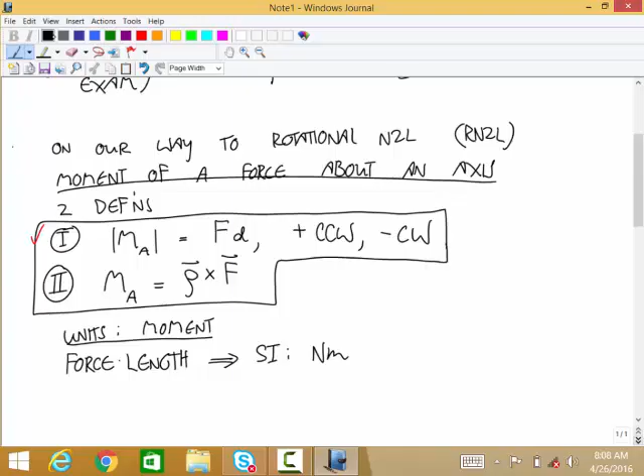That too. It sounded long to me. Then why are you leaving it out there? One of the back tables. What?

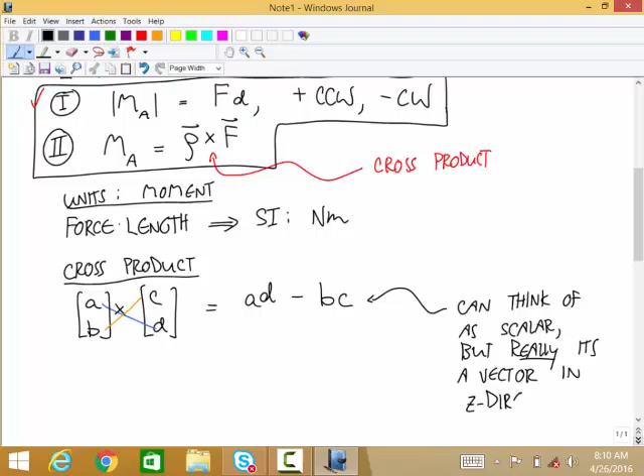So let me start by saying a couple things about the end of the semester. What's left? Our exam 4, our last exam, is a week from Friday, so that's Friday, May 6th.

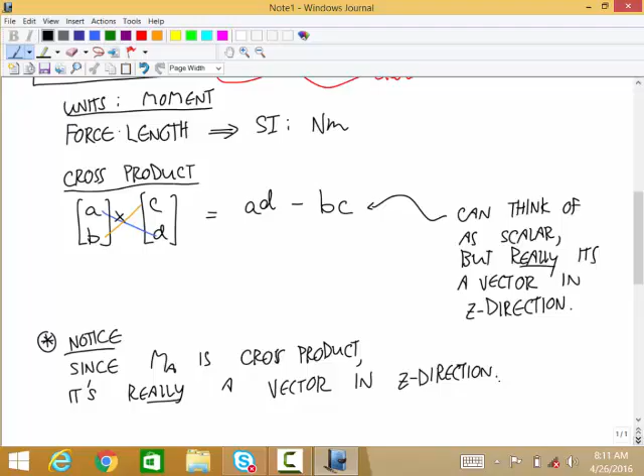And we have a final lab exam. I didn't look up when, I think that's probably the Thursday before. And the AP test is Monday, May 9th.

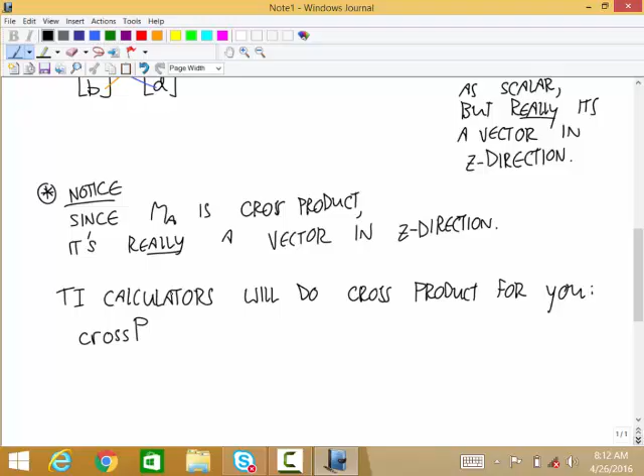And then this isn't on the syllabus, but this is something I talked to Meredith about, and I'm going to offer this option: a makeup exam. It's basically going to be a new version of exam 4, a cumulative exam.

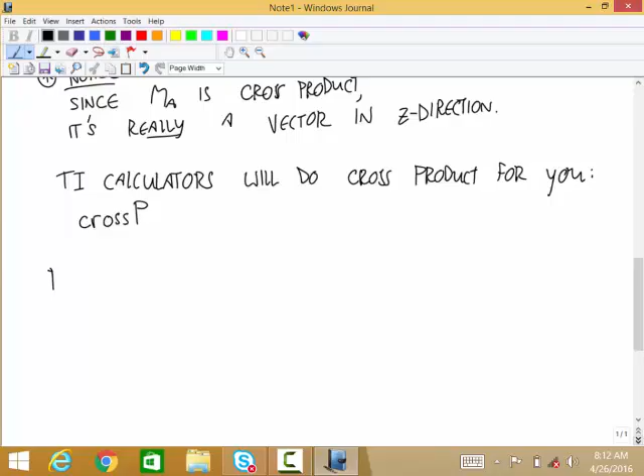But that score can replace any one of your first 4 exams. So if you're not happy with any one of your first 4 exams, you can do the makeup on, I think Meredith and I agreed, Tuesday morning, at the normal time. Yep.

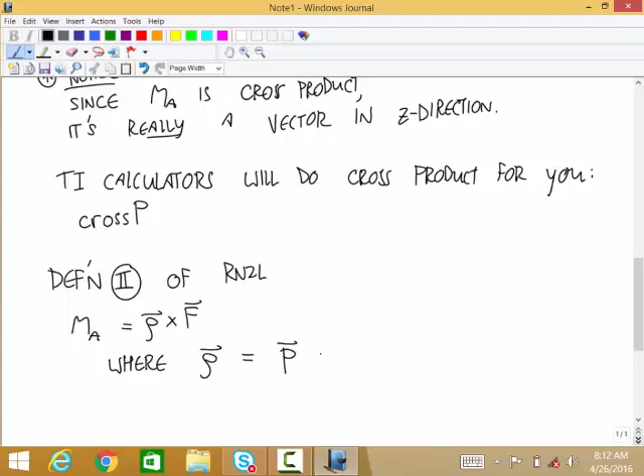Well, I guess maybe we'll do that on Tuesday of next week. What? The lab exam. Oh, the lab exam. Okay.

Is the makeup exam going to be on May 10th? May 10th. Yes.

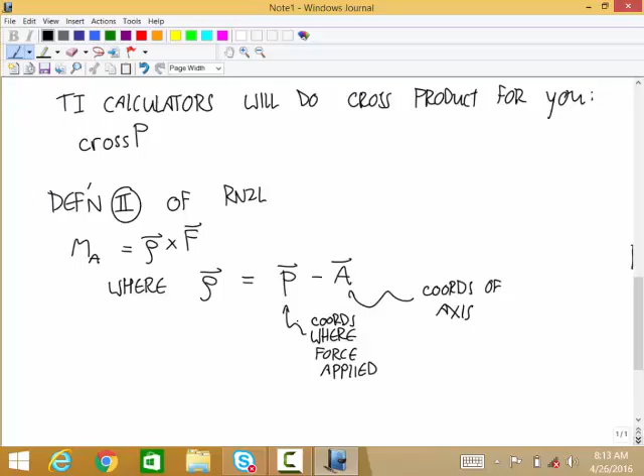So that's the stuff that's coming up. And this stuff all has one thing in common. What you need to do between now and then, well, the lab exam is kind of its own thing, but definitely the other 3, is you need to...

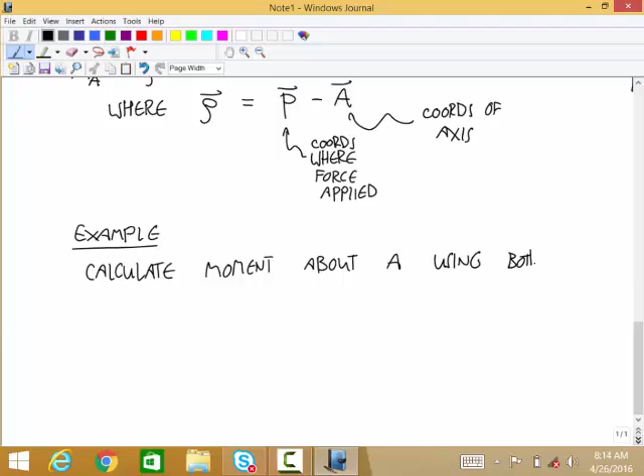Between now and then, you need to skim all the notes. Your goal is to remember everything I said. That's maybe not some of the stupid stuff about the bell signifying God bless you and stuff, but all the stuff I said relating to physics. Your goal is to remember all that stuff. I know that's a lofty goal, but that's what you should aim for.

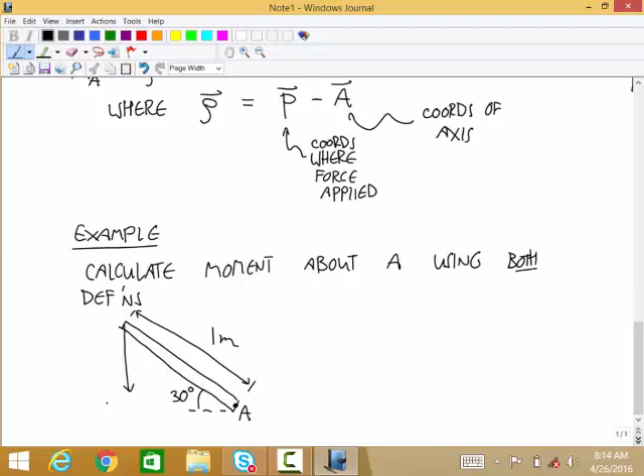That's your goal. And then the second thing is, let me say this a little stronger: you should know how to do all the assignment problems.

And the best way to do that, I think, is you need to start looking back at this stuff now, because you don't have a lot of time. I would say skim the notes and look back at the problems, starting at the beginning. Ask yourself, do I know how to do this problem? Do I know the steps? What are the steps? If you know, move on to the next one. If you get to one you don't know how to do...

Think about where you're unclear on what to do, and then look at the solution. If you're more unclear than that, then you have to work through the problem.

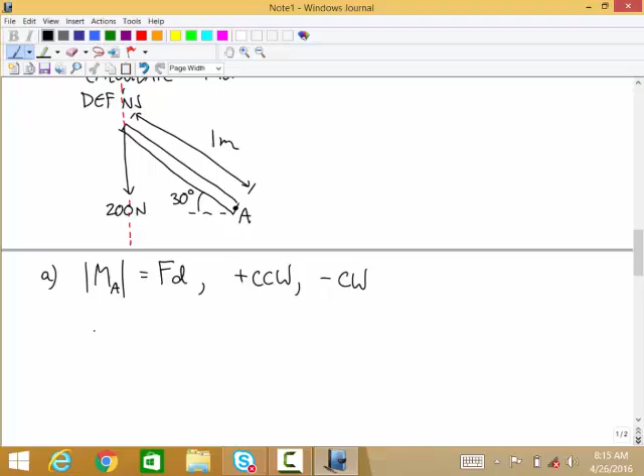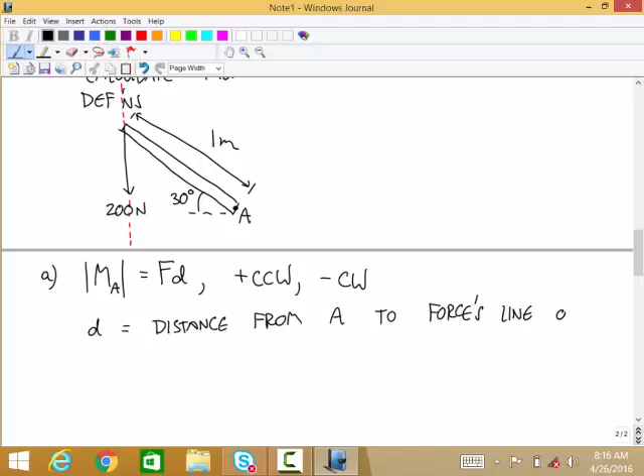So that's your goal. If you get to the point where you remember everything I said and you know how to do every problem I've assigned, you're going to get 100 on exam 4 and the makeup test, and you're going to do great on the AP test. That's kind of the upper level of what you're trying to get to.

Anybody have any questions? Could the makeup exam technically replace a homework quiz score? It's unbelievably bad. What's the point of that, actually being more valuable to you? That is a funny question. Yes, that is fine with me. But if that's your position, you don't have much to worry about, you know what I mean? But yes, do that. Okay.

Because I think each homework quiz is only worth about 2% of your grade or something, right? Maybe a little more, but less than 5. Any other questions?

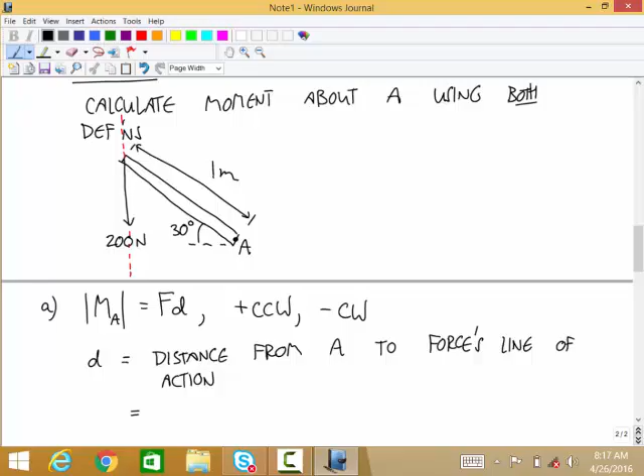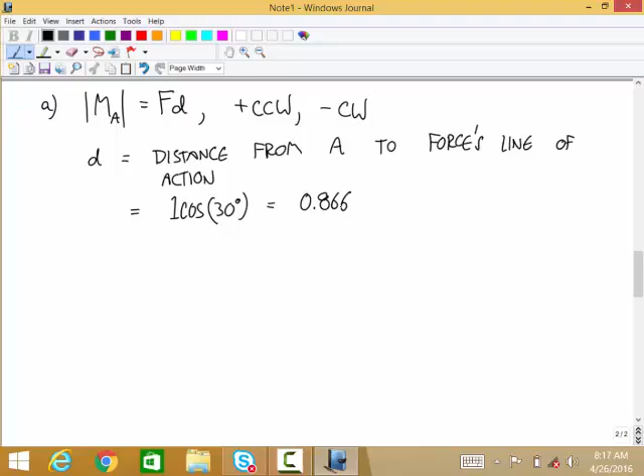Okay, so here is what we've been talking about. We're on our way to the rotational version of Newton's second law. And we just started talking about the moment of a force about an axis.

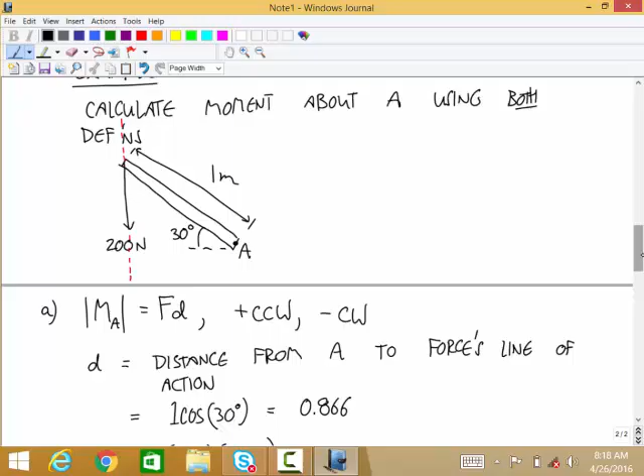And there are two definitions. The first one was that the absolute value of the moment about the axis is equal to the force times the distance, where positive is counterclockwise and negative is clockwise. The second definition we haven't gotten to yet, but I'll write it out. That uses a calculation called the cross product. So the moment is equal to a rho vector crossed with a force vector, and that does the signs for you.

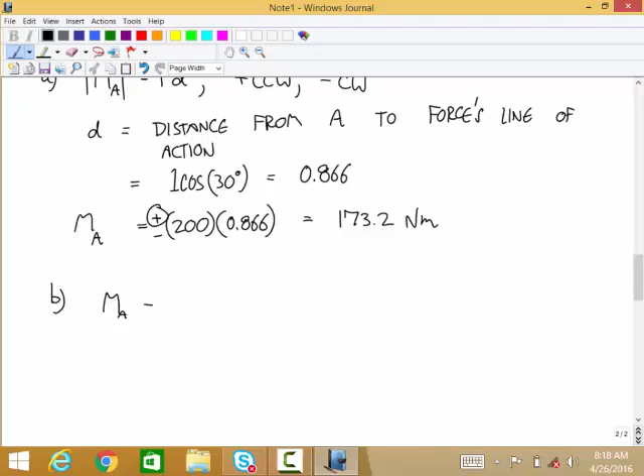The units of moment are force times length. And so in SI units, that's Newton meters.

Okay, so we're done with this one. You kind of need to be able to use both of these two definitions, because sometimes one is a lot easier and sometimes the other one is a lot easier to use. You could just say you're only going to remember one and always do it that way, and that wouldn't be the end of the world, but you'd be adding a lot of extra effort.

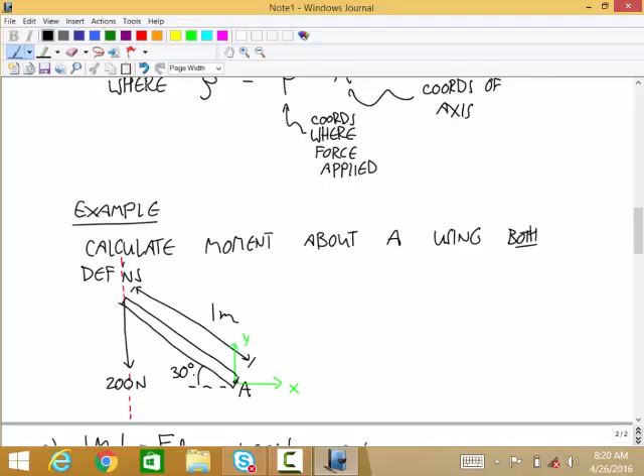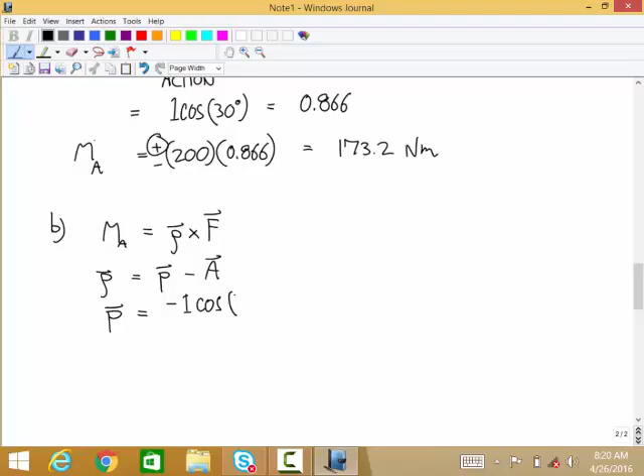Okay, so this operator is called the cross product. Have any of you seen cross product in a math class? Okay, anyone else? Yeah, okay. Well, it's easy to calculate.

The cross product of the vector AB and the vector CD is equal to—so the cross comes from the fact that you're multiplying these two, AD, and then you're multiplying these two and subtracting that. So it's AD minus BC. That's the cross, going across. It's really a three-dimensional thing.

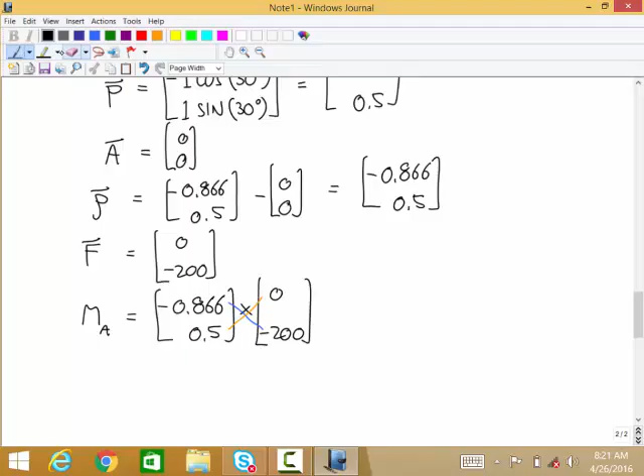You can think of this as a scalar, but really it's a vector pointing in the z direction. And if you're dealing with fully three-dimensional vectors, it gets a little more complicated, but it's the same idea. This is all we're going to use.

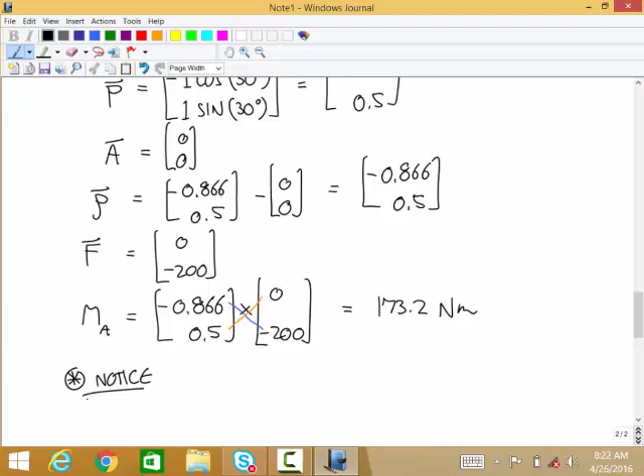So the thing to notice for us, since moment is a cross product, since MA is a cross product, it's really a vector in the z direction. We're not going to use that fact, or that's not going to really come into things, but in your next physics classes, or if you take engineering classes, you're going to use that fact.

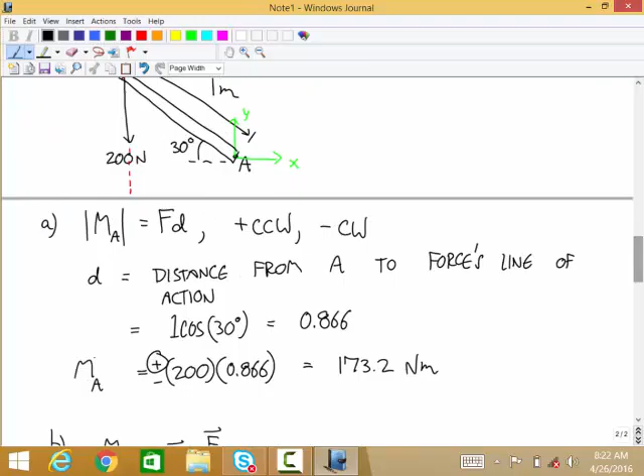TI calculators—they'll do the cross product for you. You just have to enter in the function, I think it's lowercase CROSS uppercase P, and then you have to enter in the two vectors, and it'll calculate that for you. So it's sort of nice when you get used to it. If you need help figuring that out, let me know.

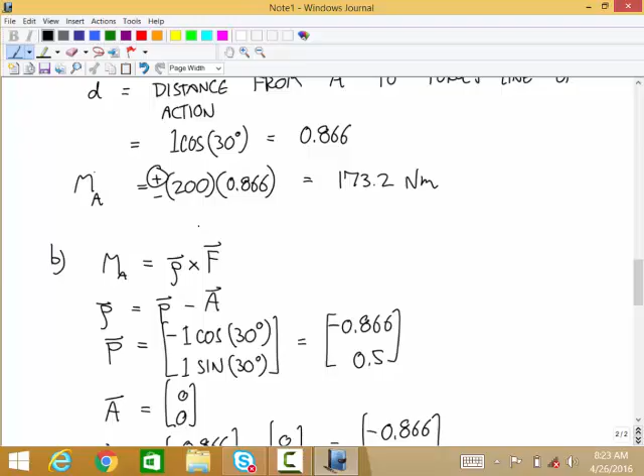Okay, so definition 2 of moment says MA is equal to the vector rho cross the force vector, where rho is equal to P minus A. And what are P and A? We could keep doing this forever. This is where the force is applied, so that's coordinates, and this is the coordinates of the axis. So it's a vector going from the axis to the point where the force is applied.

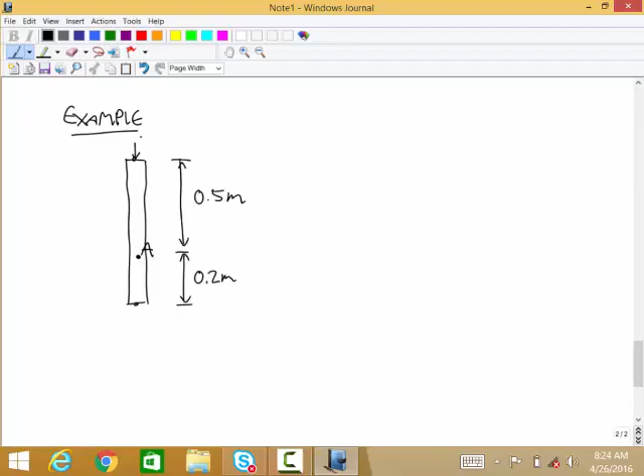Okay, so let me do an example, and I'm going to do an example where it's not too bad to use both definitions, and we're going to do it both ways. So calculate the moment about A using both definitions.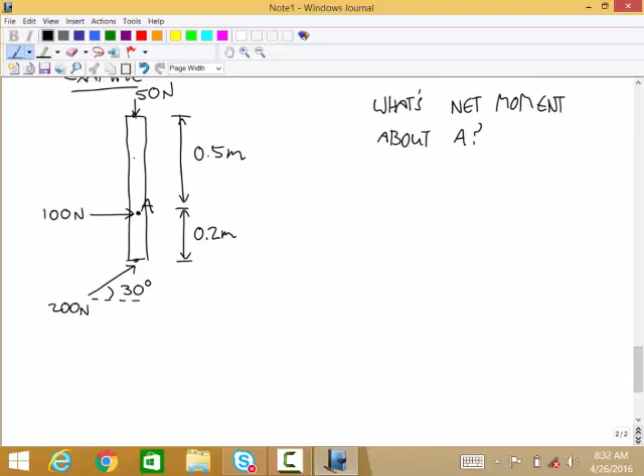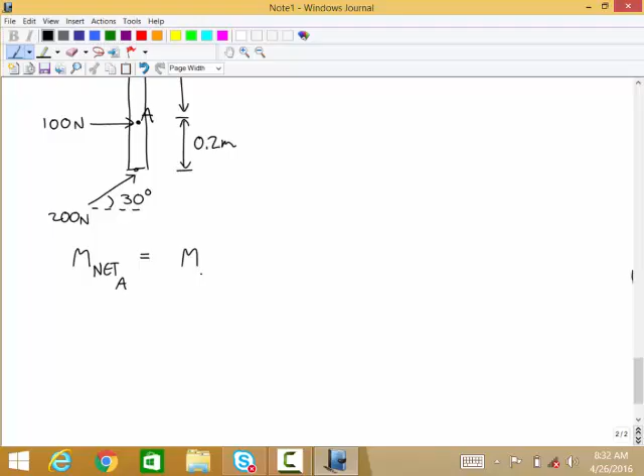So first we're going to use this definition where the absolute value is equal to the force times the distance. Counterclockwise is positive, clockwise is negative.

Anyone remember what that D means? It's a distance, the distance between the forces' line of action. Yes, that's right, exactly. So to use this, you have to be able to imagine the force's line of action. The force continues in both directions.

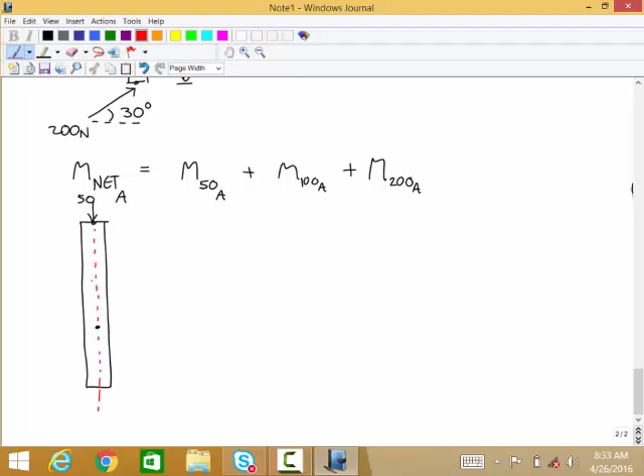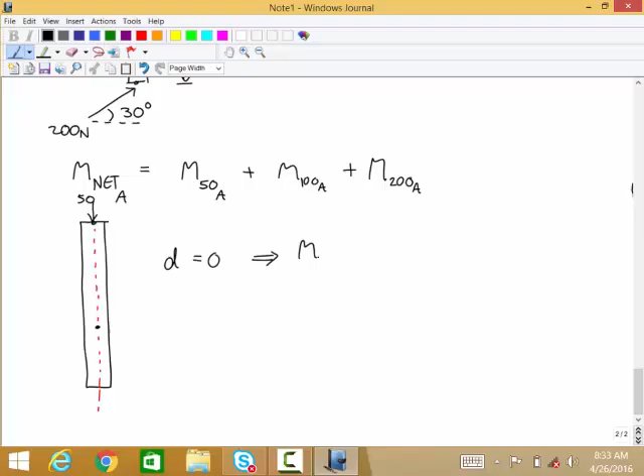So D is the distance from A to the force's line of action. And how would you calculate that D for this problem?

Someone go up there and show me what distance we're calculating. And remember to march. Left, right, left. Right. There to there. Very good. That's the distance we want—the shortest distance from A to that line of action.

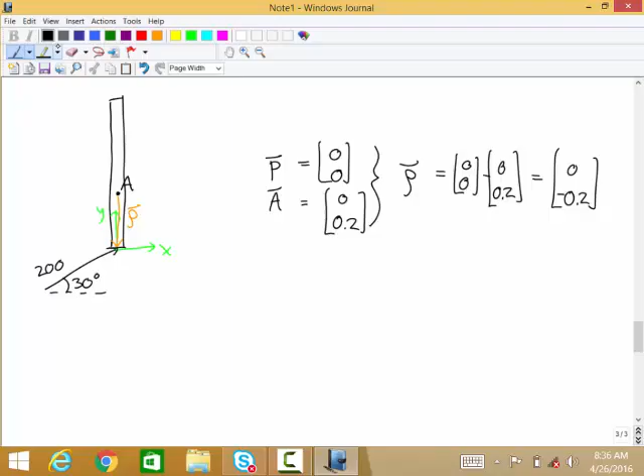Okay, now let's do it the other way. For this example, the first definition is a little easier to use. That's not always the case. But to use the second definition, we're going to use that MA is equal to

rho vector cross force vector. Does anyone know what we're going to get for the moment when we use this definition? The same thing, that's right. Otherwise, one of them doesn't work.

Okay, so that rho vector, rho is equal to the coordinates of where the force is applied minus the coordinates of the axis. So what are the coordinates where the force is applied? Well, we have to choose a coordinate system, I guess. Might as well choose this one. What are the coordinates where the force is applied?

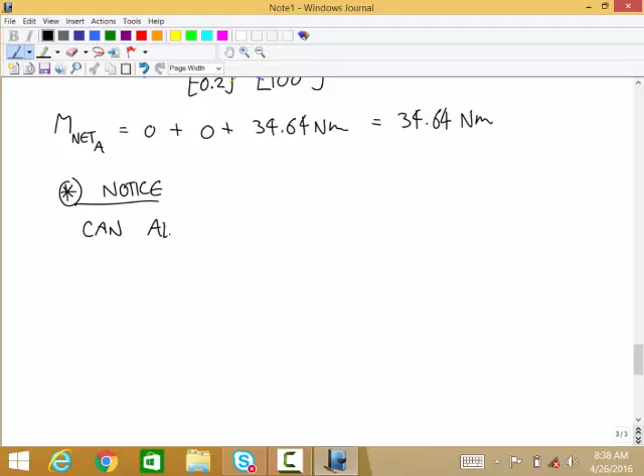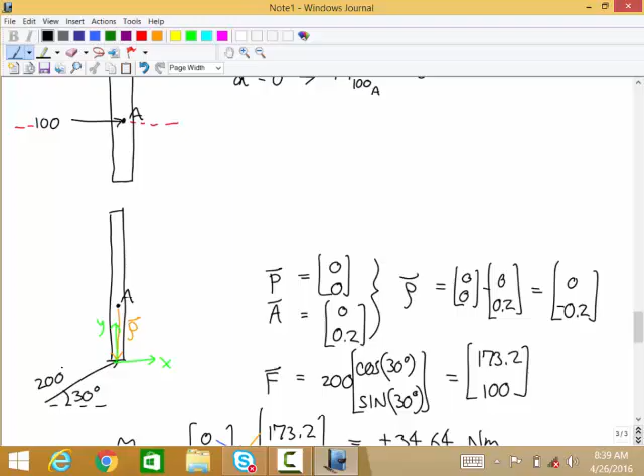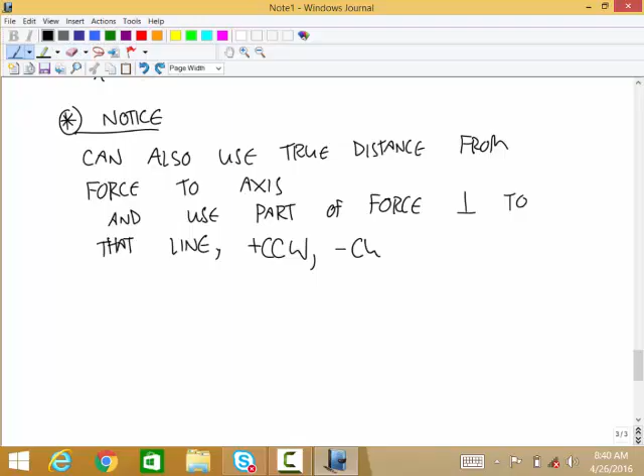One thing I want you to notice here, this is an important thing. It's important to us because of moments, but it's an important fact about the cross product in general. The order matters for the cross product. If you have a vector A and you cross it with B, that's the negative of what you get if you take B cross product of A.

Okay, thanks. So when you calculate this moment, if you're using this second definition, where is that second definition? Here it is. If you calculate that moment as F crossed with the rho vector, you get the opposite. Your answer is opposite. Okay, you get the wrong answer.

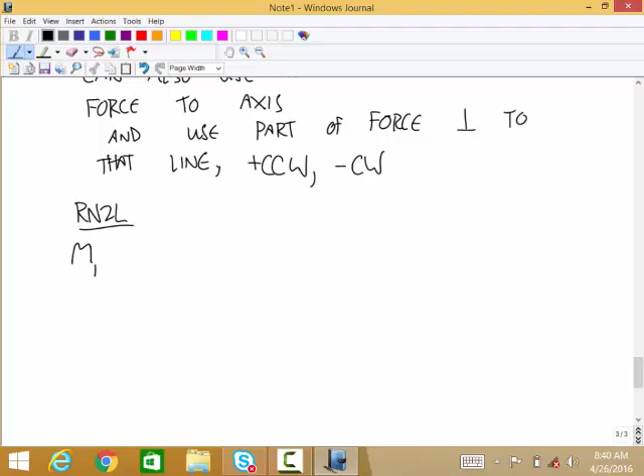That's sort of a funny thing. It's a little hard to get used to because every other multiplication type operation that we ever use, order doesn't matter. Well, multiplication order doesn't matter, the dot product from calculating work, the order doesn't matter, but cross product's different.

Okay? If you don't believe me, believe David. He'll tell you the same thing, right? Thank you. He'll back me up.

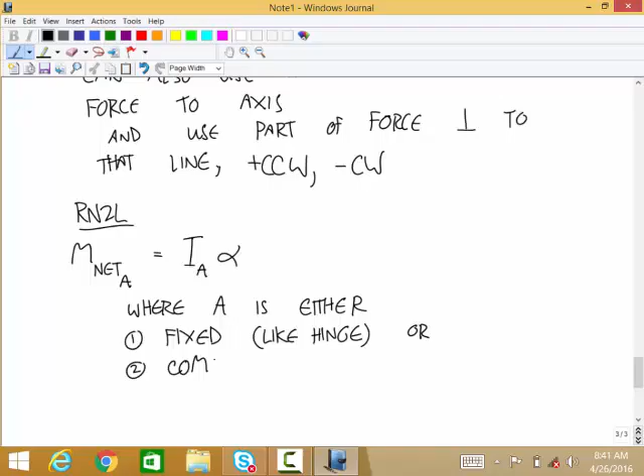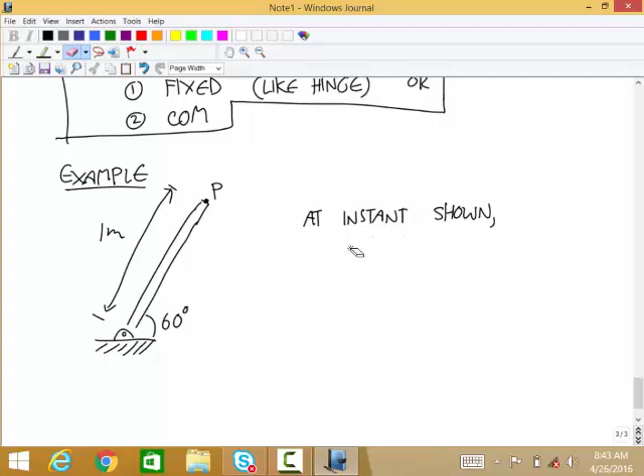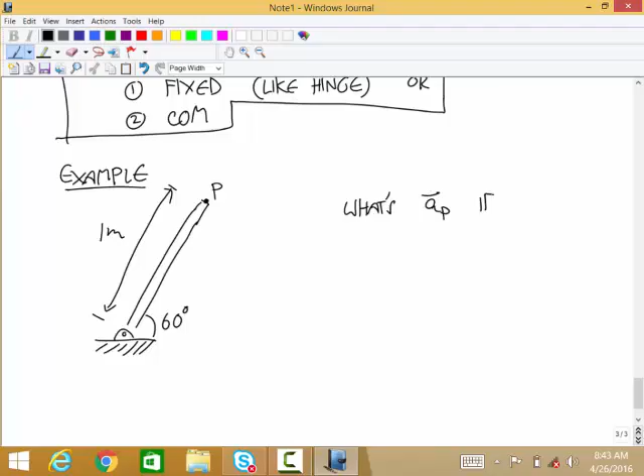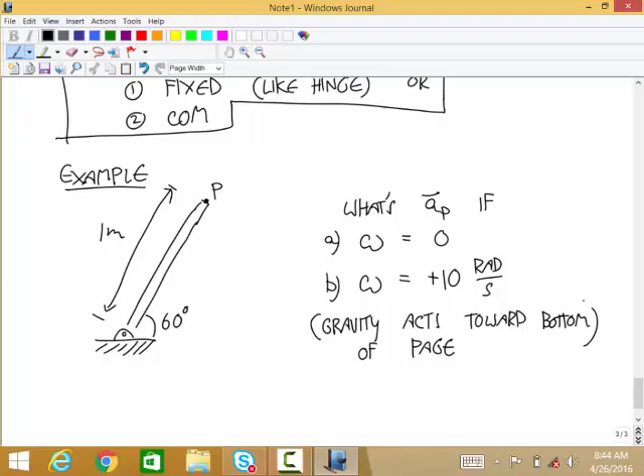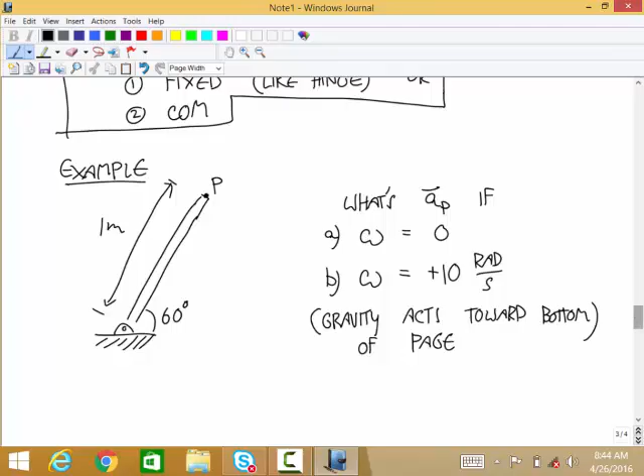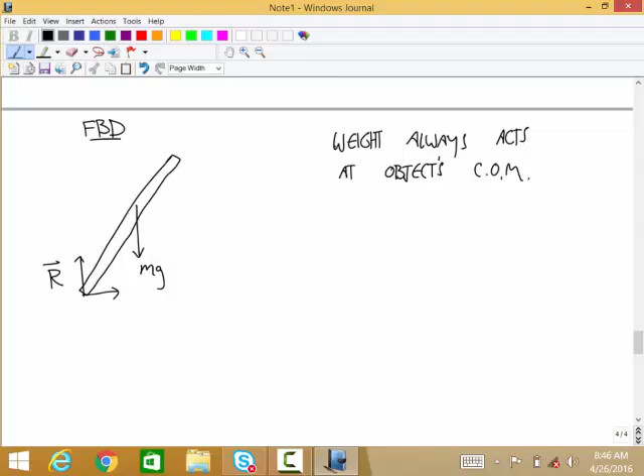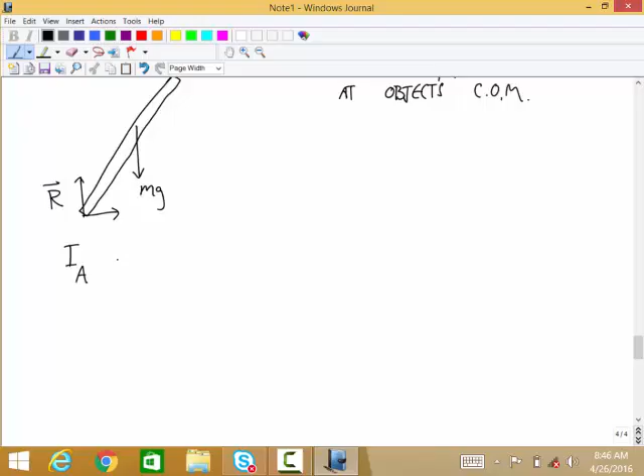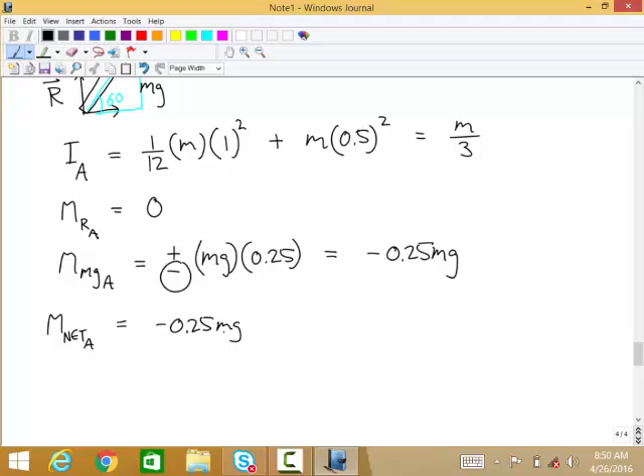So notice there's really a third option you could use here for calculating a moment. You can also use the true distance from the force point to the axis, and use the part of the force that's perpendicular to that line. That always works for moments, so if you want to do that instead, you can.

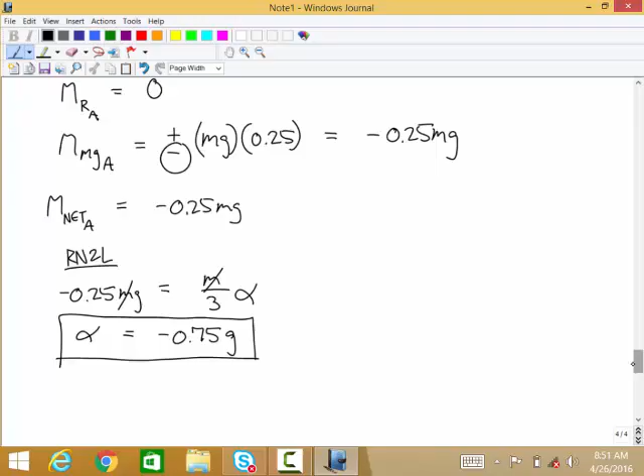Okay, so finally we're at the rotational version of Newton's second law. And it says this: the net moment about A is equal to the moment of inertia about A times the angular acceleration. And there are two choices for A. A can't be anything. A is either a fixed point, like a hinge, or it's the body's center of mass.

Okay, so what are the two choices for the about point? For the axis location? Center of mass or the fixed point of rotation. I like you even said the order backwards. You made it your own. I like that. Paraphrase. Yeah, I like it. Good job. Okay, two choices.

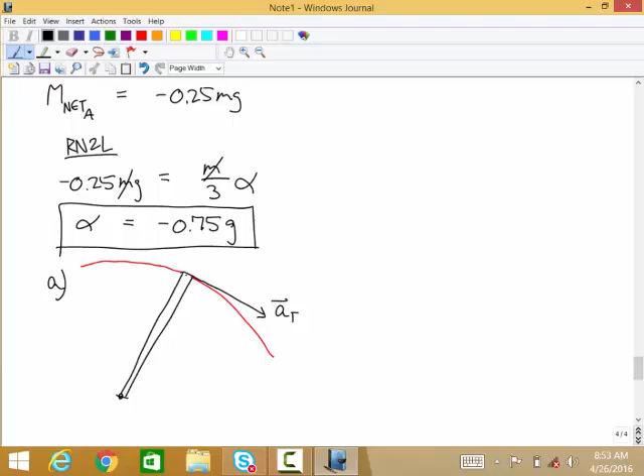True or false? There are three choices for the axis. False, correct. You're right. Okay, I think you're, at least you and Josh are getting it. I don't know about everyone else, but.

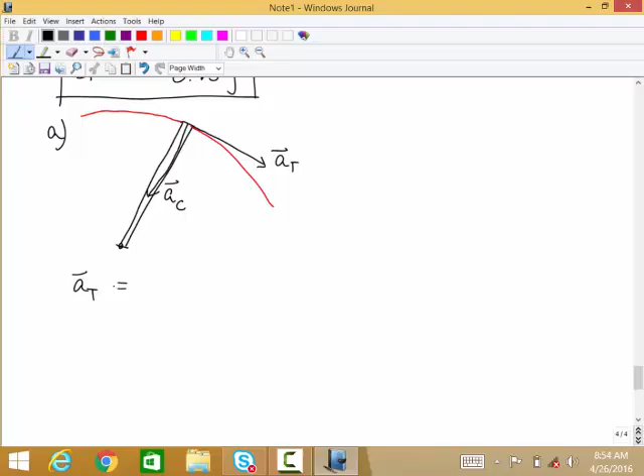Okay, so let's do an example. So say you have this slender rod that's connected to the ground by a hinge, and this angle is 60 degrees. And let's say that at the instant shown, this object has an angular velocity that's equal to 10 radians per second. The question is, oh, and I need to give you some stats about this thing. Let's say this is 1 meter. Ooh, let's do this as two parts.

So what's the acceleration of that point P if first the angular velocity at that instant is equal to 0, and second if that angular velocity is equal to positive 10 radians per second? And the weight is acting towards the bottom of the page.

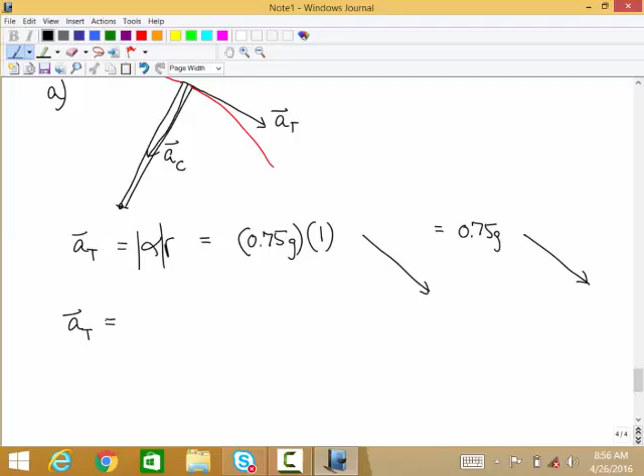So there's some force down here acting, I'll just call it R. We don't know what that is. It turns out that's not going to come into our calculation. And then we have a weight force here, mg. Oh, and where does the weight act now? With particles, that didn't matter, but with rigid bodies now it does, because forces can act at different places. So, yep, that's right - the weight always acts at the object's center of mass.

Okay, so let's first calculate - we know we're going to use the rotational Newton's second law, so let's first calculate the moment of inertia. So moment of inertia about that axis A is equal to 1/12 times the mass times the length squared.

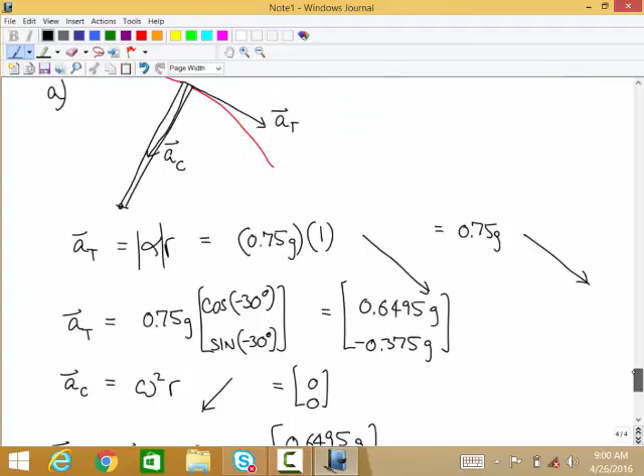And now the moment produced by mg, that's equal to - so plus or minus, the force is mg. What's the distance from the line of action of that force to the axis? 0.5 meter - well, this distance is 0.5, so I guess it's 0.25, right? Okay, but yeah, you just do that trigonometry. That's 60 degrees, this is 0.5, so it's 0.5 times cosine of 60. And then is it a positive or negative? Negative - yep, that force, if you apply that force is the only thing acting, this is where it rotates, that force is going to make it spin around this way, and so that's negative.

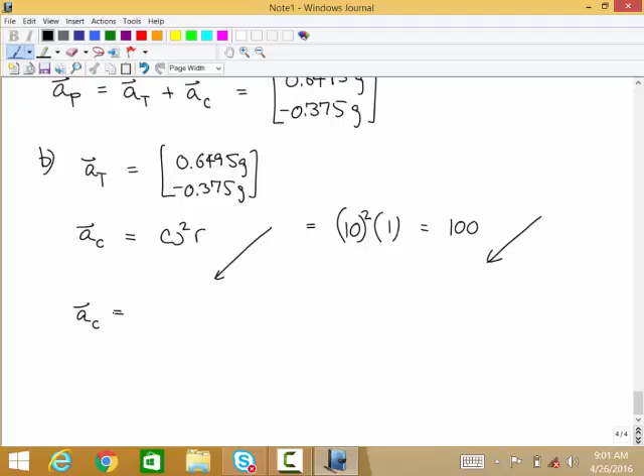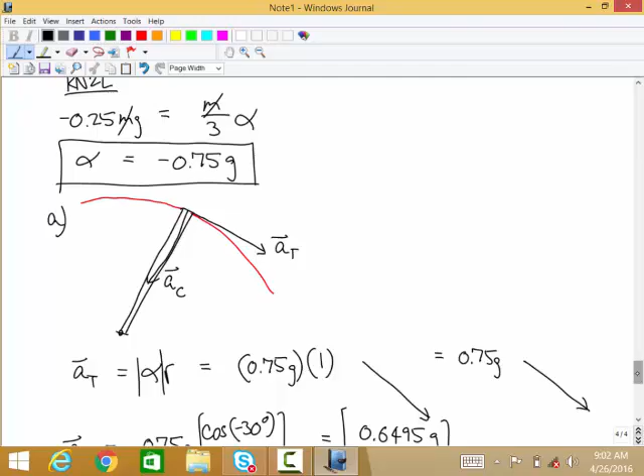And so the moment produced by the weight is equal to negative 0.25 mg. And so m net is equal to negative 0.25 mg. And so now the moment equation, the rotational Newton's second law, says negative 0.25 mg is equal to m over 3 times alpha. The m's cancel, and you get that alpha is equal to negative 0.75 g.

Alpha is the rotational acceleration? Yeah, the angular acceleration, that's right - acceleration, yep. And so now this is true no matter what - notice the velocity, the angular velocity never came into any of this, so this is true no matter what the angular velocity is. But if you remember, like all our problems with circular motion, what we're really asked for in this problem is the acceleration of that point P. And to find the acceleration of that point P, the angular velocity does matter because of centripetal acceleration.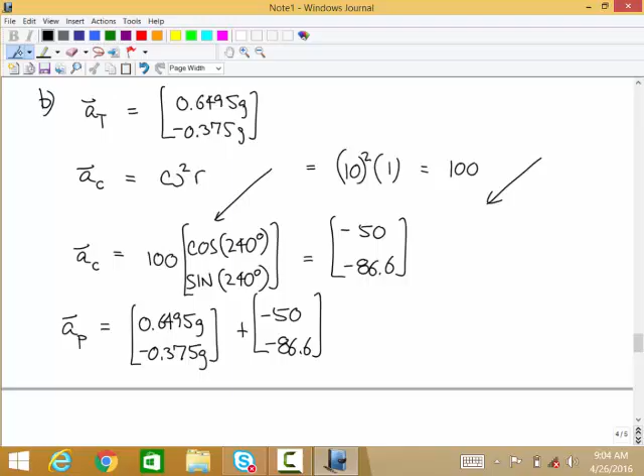And so now we're going to split it up into - we'll answer part A, and then after that we'll answer part B. Okay, so for part A, here's the circular motion. Right, that point's moving around this axis in a circle. What's the velocity direction? So for part A, there's no angular velocity, so there's no velocity at all because the velocity is equal to omega times r. So there's no velocity. What's the direction of the tangential acceleration?

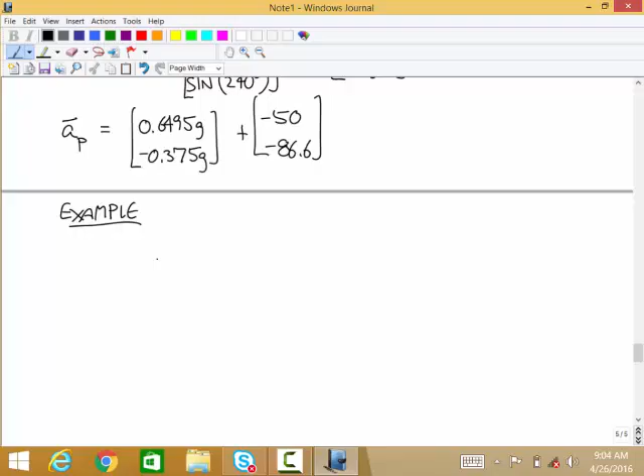Down this way, diagonally down. And then centripetal acceleration would be this way. We're going to see that that's equal to 0 because it needs to have angular velocity to have centripetal acceleration.

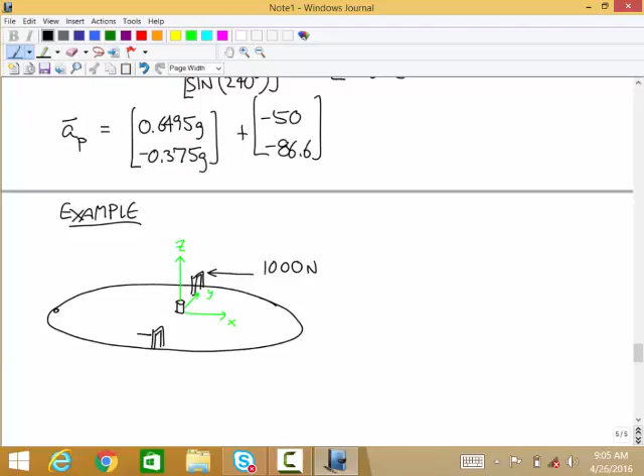Okay, so for the tangential acceleration, that's equal to alpha times r. So 0.75 g, and then what's the radius of the circular motion? 1. And it's pointing in this direction. So 0.75 g in this direction.

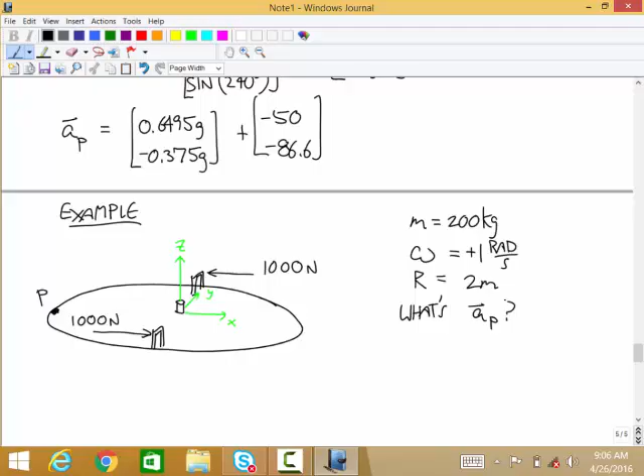Anyone have an idea how to put that in vector components? What's the angle that we want for cosine and sine? That's sort of the key to this. Would it be negative 0.5 g? No, when we're calculating, the plus minus signs are just directions. And when we do tangential and centripetal acceleration and velocity, we're doing the directions just based on what we know about circular motion. So you only want to use the absolute values of those.

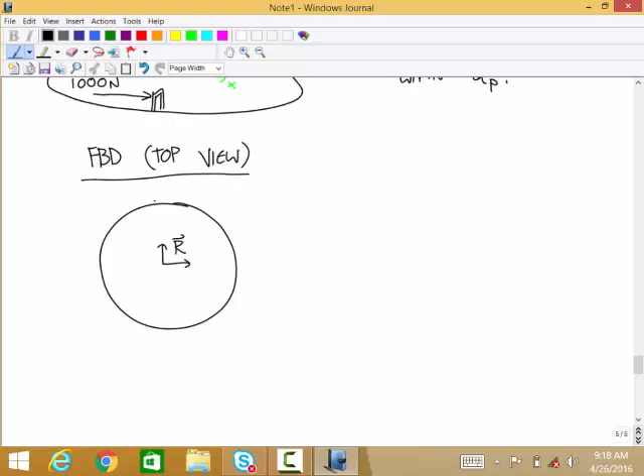Okay, so for the cosine and sine, what's the angle that we need to use there? Right. The way that makes sense for me to do this - start at the positive x-axis, go positive 60, and now you're there. Then from here to get to this, we're at positive 60. Now go minus 90, clockwise 90. And now you're in the direction we want. Plus 60 minus 90 gives you minus 30.

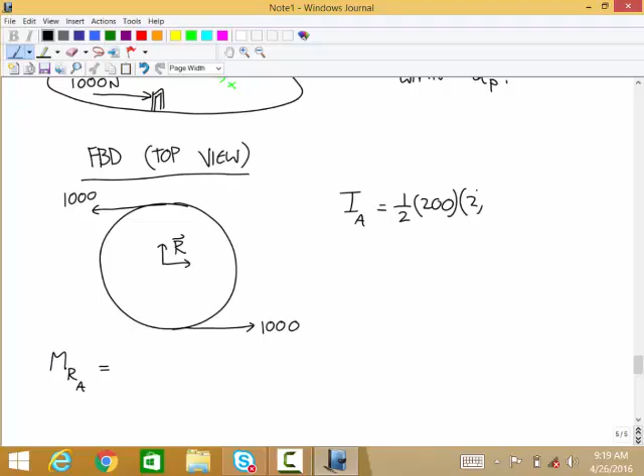So the tangential acceleration vector is equal to 0.75 g times cosine of negative 30, sine of negative 30, and so you get - can someone multiply, what's 0.75 times cosine of negative 30? I've got 0.6495 g. And then this one, that's just negative 0.5, so this is negative 0.375 g.

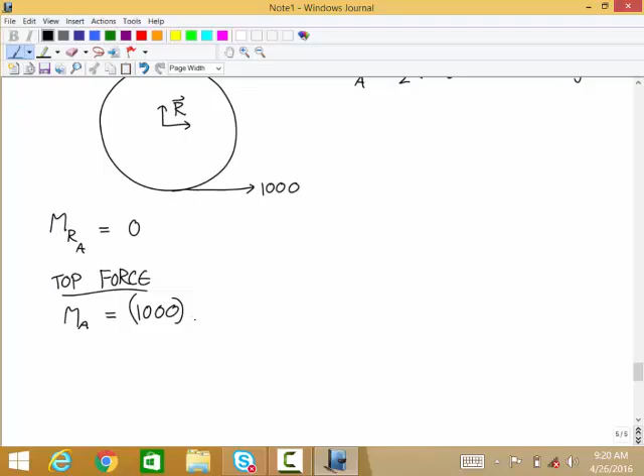And then the centripetal acceleration is equal to omega squared r in this direction, so that's 0 since there's no omega.

I'm not sure if you know this, but on the AP test, if we just left our answer as 0.75 g times cosine of negative 30, sine negative 30, would that lose points? No, you wouldn't lose any points. I think really they'd probably prefer that.

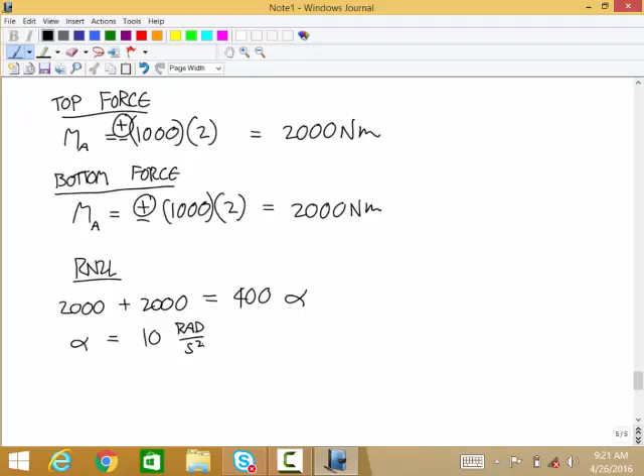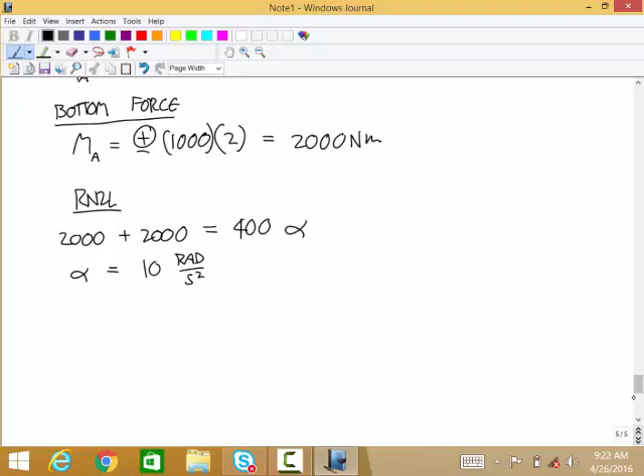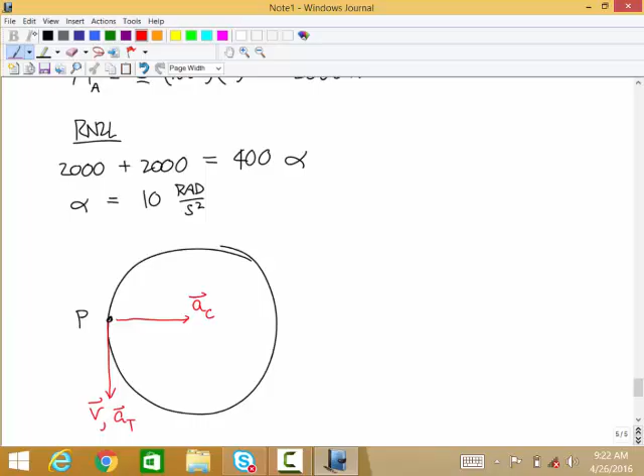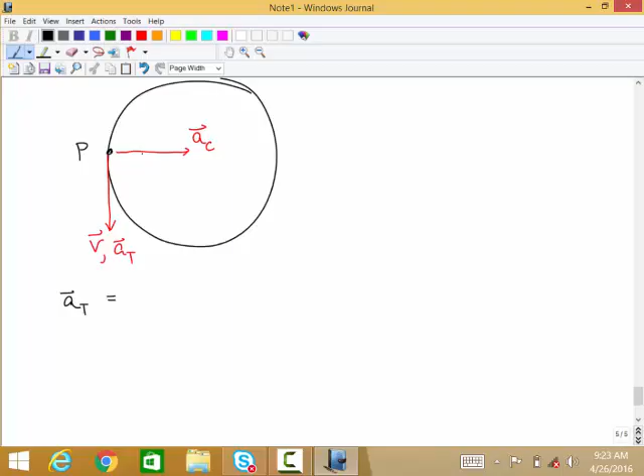Okay, so now part B. What changes in part B? Who even remembers what this problem is? That's right. So now the only thing that changes is at this instant, the angular velocity is now positive 10.

So now the velocity, there's a velocity vector that doesn't matter for the acceleration. We still have that the tangential acceleration - that's the same, that doesn't change.